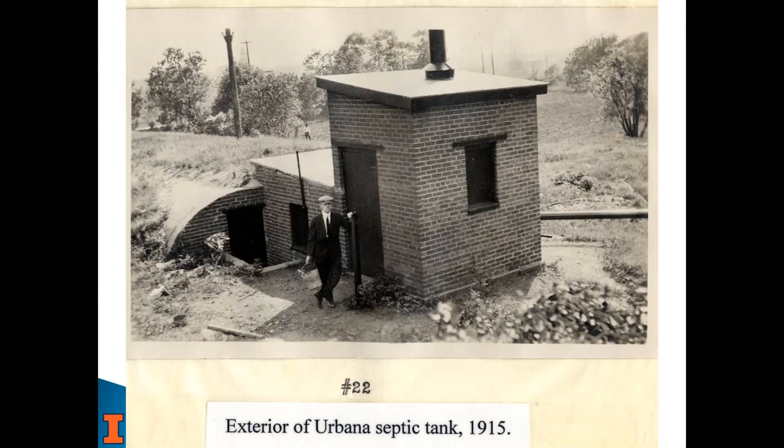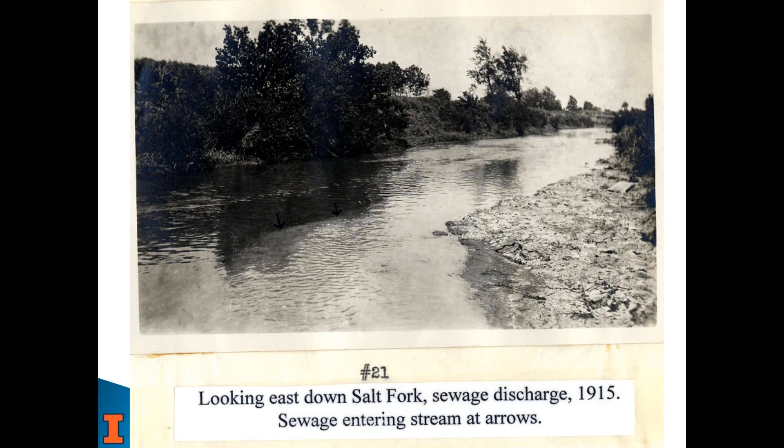And just to show some examples, Urbana, Illinois, the University of Illinois campus is in the Twin Cities of Champaign and Urbana, Illinois. Together, there's about 220,000 people in both towns. In 1915, this was Urbana's septic tank. And that straight pipe runs to Salt Fork, so direct sewage was entering streams. I know on this, it says see the arrows, they're very hard to see on here. But if you look at the shade from that tree where it goes from black to light gray, that light gray is all the sewage entering Salt Fork. And so this is where we were back then.

The water survey was involved in a lot of the seminal research related to wastewater treatment. Yeah, and it's a really cool history about our public health and all those things. I try to highlight that we've been around a long time working on some of these issues. Today, we're more of an applied research and outreach and education organization. We house the state's well logs in Illinois. We do a lot of support for communities and private well owners in Illinois and across the country.

So I'm Steve Wilson. I'm a groundwater hydrologist here at the Water Survey. With me is Katie Buckley, who's our Water Resources Outreach Specialist, predominantly working on the private well class. She makes me look good and manages all the back end for all of these events.

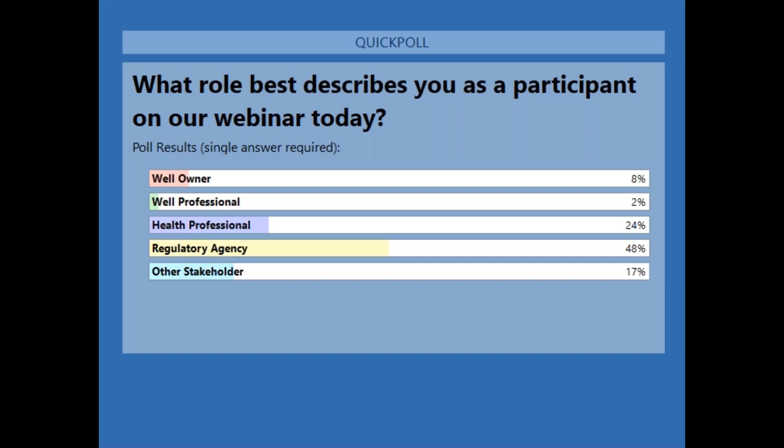If you are a well owner and you've not had a well assessment done, you can contact your RCAP region and/or contact us, and we'll get you in touch with them, and they can put you on a list to have an assessment done. As you'll see today, it's pretty useful to the homeowner, and it's all free.

Okay. So private well assessments, let's start with that. We developed this in 2016 with a group of private well experts that included public health, extension, drillers, you name it, several regulators. And it's really comprehensive.

We'll go through this today, but the idea was to create a tool that someone who is qualified and understands enough about private wells to actually fill this out can work with a well owner one-on-one and ask all the necessary questions: have they tested? What kind of pipes do they have in their home? Do a site assessment, find the well log if it's available, and look at the geology and any issues that might be there.

The idea is to do a vulnerability assessment, that's what I would call it, on any potential issues that a well owner should be aware of regarding their well, and also to remind them of best practices like testing annually for coliform and nitrate and other things every 5 years or so. So as I mentioned earlier, it's a fillable PDF.

RCAP, the regions have been conducting these assessments since 2016 or 2017 probably, and they've done over 3,600 around the country, which is really awesome. When you think about the size of the program and the amount of effort that's gone into completing even one assessment, it's remarkable what they've been able to accomplish. On the other side of that coin, there's 23 million private wells in the United States. And so we have a long way to go to reach and educate all those folks.

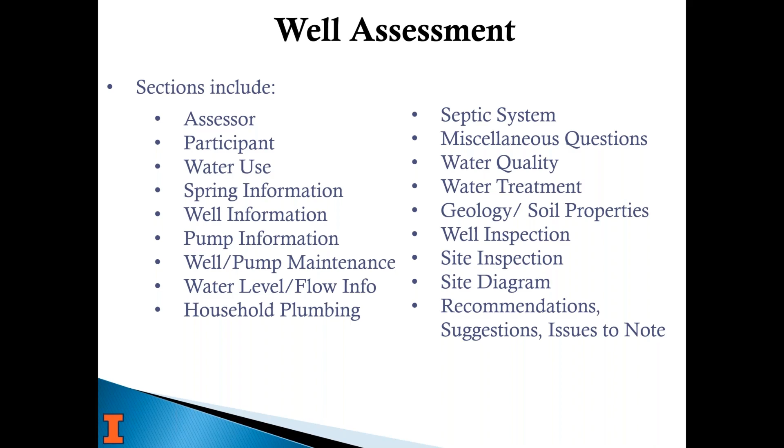As far as the on-site tool, it was built so that it could fit with the well assessment, but also could be used independently. We have 17 to 18% of all the homes in the United States have private wells, but over 20% of all the homes in the United States have septic systems. There's more on-site wastewater systems than there are wells.

And so we certainly run into places where someone may have an on-site wastewater system, but they're on community water supply. And we're going to go through 2 examples, so I won't go through this. Again, it's meant so that it could stand alone or be used together. Some of the sections are redundant, like who the assessor and the participant is, and water use, I guess, but most of it is unique to an on-site system.

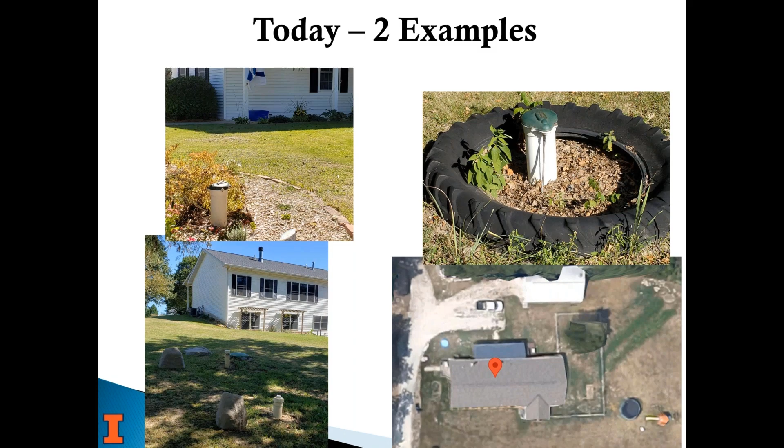So here's our 2 examples. The 2 pictures on the left are our first example. That's the well in the top picture and their aerobic system behind their home. Those fake rocks cover up the 2 white pipes sticking out of the ground. And then on the other side, we have another well, and then it's just a picture of their home. This one's interesting because in this Google Maps image, you can clearly see their septic tank and drain field, and it was really eye-opening to see that.

So I do want to mention that in Illinois, we've required well logs since 1968. And our State Geological Survey, who again is our sister agency, we share all these logs. They have this online mapping tool that's really terrific and shows you all the wells in the state that we have logs for. So we ran into this situation where the arrow points to the house that we're doing the assessment on, and every one of those homes, both on Doan Drive and Nicky Drive, so there's 13 or 14 houses there, I think, have a private well, and yet we only have records for 1.

And all these wells were put in the early 2000s. So that's a red flag. That means we have a driller potentially who's not filing logs with the county and getting a permit, which is illegal. And we're not a regulatory agency, but we use this information. And so there's one well there. It says it's 93 feet deep.

And when I looked at that log, the driller was also listed for several in the area. So I decided to give him a call and just find out if he knew what was going on. I'm going to scroll forward. I might have to go back. Oh, yeah. So anyway, when I talked to the gentleman, he's retired. He says, we turn in every log that we do.

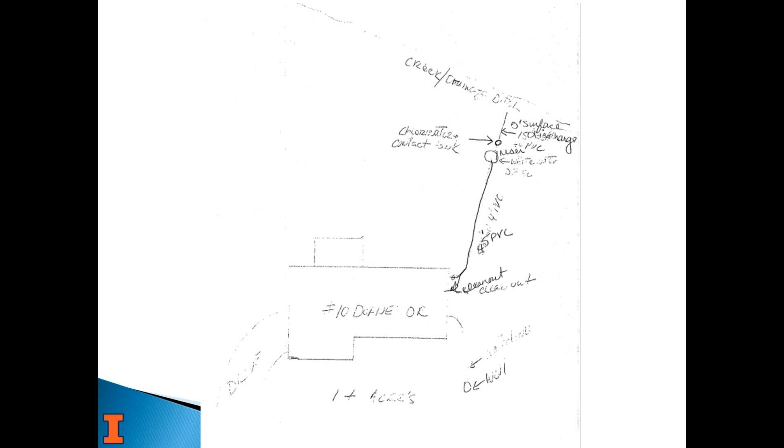We were also able to talk to the Piatt DeWitt Bi-County Health Department and get all their septic information or private sewage information. And so this permit obviously helped as well. There was a hand-drawn image of the house where the unit is, as well as the well. There's also a drawing that was done later, and this is facing west, I believe, but it's going downhill. There's surface discharge near a small ditch or creek.

This is the location. You can see where the house is. There's a pool off to the north. There's a bunch of trees, and then there's a fire pit down by the small creek. And so when we put all the information in that we know about the system, there's 140 feet between the aerobic unit and the water well, and it's down gradient. The cleanouts at the corner of the house, when we went out and visited, we were able to put all this information together.

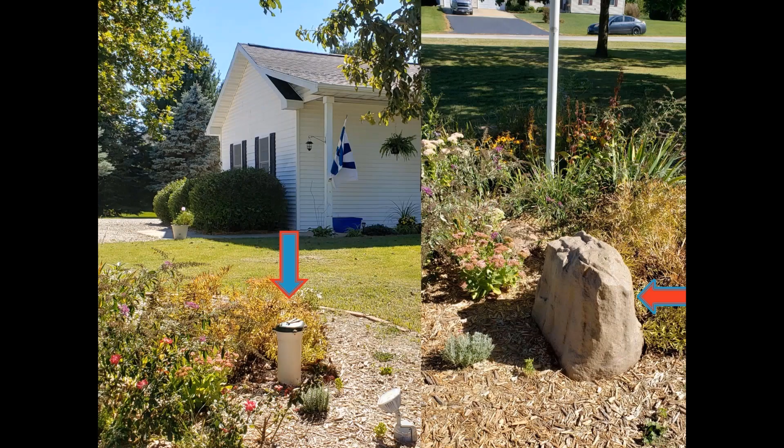And the idea in the assessment in the end is you provide this to the homeowner. If they were near somebody else or near a source, or if there were cattle nearby or some other thing that might be a vulnerability to the well, then that would be shown on here as well to give them that information. And so here's their well up by the house, and then it's covered by another fake rock, just so it looks aesthetically pleasing, I guess.

And so this is the private well or spring assessment, which I didn't mention, but there's a lot more springs out there in the world than I ever realized, doing most of the work I've done in Illinois. And so there are a lot of folks who use springs for their water supply, and they're a different kind of problem because they're almost always contaminated with bacteria. They're associated with the surface. Most of the time those need to be continuously chlorinated or disinfected with UV or whatever, but this assessment will allow you to do either of those things.

So at the top, it's just who the assessor is, who the owner is, and their information. Then as you move through this, we ask about backflow devices on any of their outside hydrants or spigots. They're not doing any activities necessarily where that's much of a risk. In the first place, they weren't sure. They'd only lived there a year and a half. We did find the log in the end. Initially, we didn't have a log for them, but a lot of this information came off of the well log.

We know it's a PVC well, that it's grouted to 192 feet. That was on the log. We knew the depth and where the water unit's coming from. And for a sand and gravel well like this, the advantage is, if it's properly grouted, which this appears to be, water has to come from the surface all the way down into that unit before it can get into the well. It's solid casing down to 208. And so there's really no risk of surface contamination.

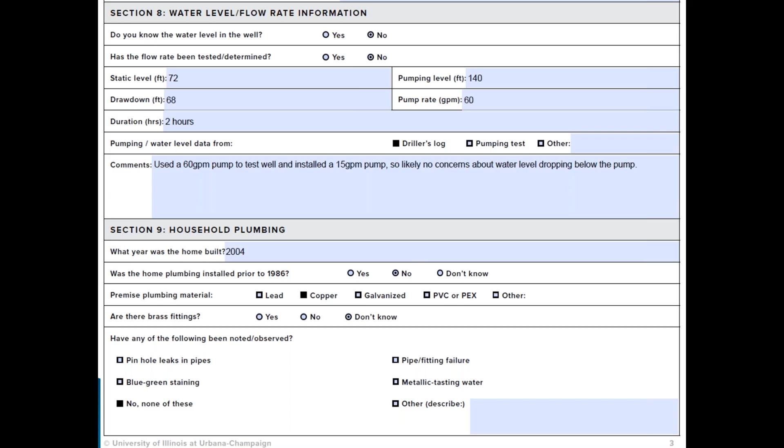We're fortunate, well, I'll get to that in the end, I guess, but we know a lot about the aquifer that this well is in. It's a large sand and gravel aquifer, and it's not typically known for having corrosive tendencies.

So this I mentioned before, this is all we put into the well assessment for on-site systems. Is there a system? Is it a conventional tank? What is it? This is an aerobic system. It's fiberglass. We asked the last time they pumped it. It's really basic questions about maintenance of the system and are they doing what they need to do.

And what we identified when we talked to these folks is that they've had to pump it twice in a year and a half. So it's filling up and there's some sediment in it. That wasn't the case with the previous owner who'd been there since 2006, I think. So that's one of the concerns and an issue. We think we've identified a reason for that, but we're not 100% sure.

We always ask these miscellaneous questions, if they have an emergency power source, meaning do they have a generator, typically if it's in a rural area. I grew up on a farm. We had an ice storm in 1976. We didn't have power for 7 days. If we didn't have a generator, that would have been a problem. A lot of folks don't think of that as being an important issue, but almost every pump I've ever worked with is electric, and without electricity, you're not going to be able to pump water.

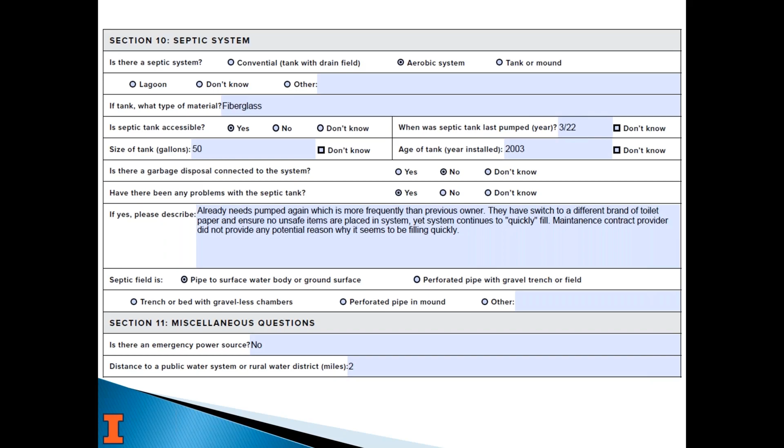We also ask if they've ever tested. Obviously, the motive here is over two-thirds of homeowners with wells have not tested their well before. They have no idea what their water quality is. In this case, it was tested for coliform and nitrate by the realtor before they moved in, and it actually had coliform. So then it was shock chlorinated, and following tests showed that it was clear. The sale went through, but they've not tested for anything else.

We recommend that you test for coliform and nitrate annually because they indicate a pathway into your well. It doesn't mean your well's safe if those are both negative. You could have arsenic or any other kind of constituent in your water that has no taste, no odor, and is colorless. So I mentioned to this homeowner, we know that there's arsenic in some places in the Mahomet Aquifer, which is the aquifer they're in, and so it really behooved them to test.

Also, manganese has been identified as a potential health risk for small children. It causes neurological problems. Currently, it's not regulated by the EPA as a primary drinking water constituent, meaning for health effects. It's regulated because it causes staining. And so they want to test for manganese regardless. And they've got grandkids, they're over at their house all the time. And so, that's one of the things folks don't realize. It's important to test not only for you, but for the folks that maybe come to your home.

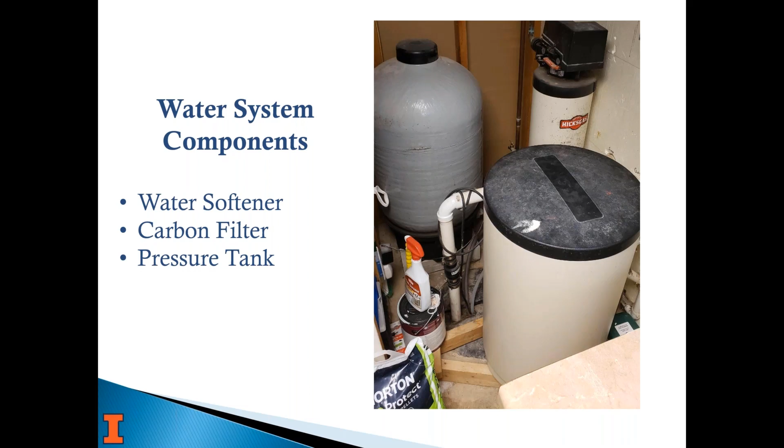This is the components in their basement. They had a water softener, a carbon filter, and a pressure tank. Nothing really out of the ordinary there. And then as far as soil properties and geology, we had a log, which is really helpful. We know the sand and gravel starts at 172 feet. It's mostly clay above that, which is great for protecting from surface infiltration. As far as the surface soil, we didn't have any information there.

But then we also do a well inspection while we're there. Is the well accessible? Is it in a pit? You'd be surprised at how many wells we still see in pits, which are both a safety hazard and also a water quality hazard, because in a heavy rainstorm, sometimes those pits fill with water, and if it overtops the well, it's no different than a flooding event. Now you probably have introduced bacteria into your well.

And then, just looking if it's got a proper cap and a vent tube, and that it's not in a floodplain, and all the common things that we have seen with wells. And if you've participated in our other private well class webinars, you've seen some pretty horrific pictures of animals in wells, or heard stories from some of the folks who participated in our webinars about what they found in their own.

We also then do an inspection of the whole area as far as what in the area might be a problem. And so there's 4 other homes with wells and on-site wastewater treatment systems. Some of those are up gradient from this home across the street. So it's just something to be aware of. If these were all shallow wells or it was in a sandy area, then that'd be a concern.

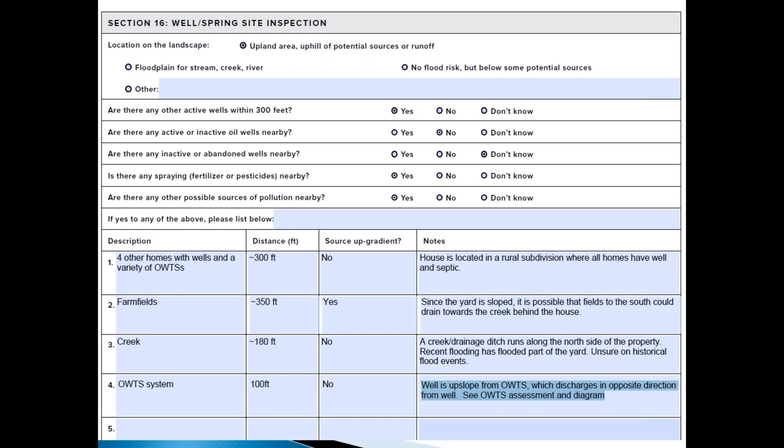Again, in this case, given the amount of clay above the aquifer and how deep it is, we wouldn't expect any of these issues to really be a problem. We just identify it so we can explain it to the homeowner. And so then, here's what we see for the whole region. There's a small creek running through, and besides the other homes that have wells and on-site systems, there's some farm fields. And the slope is toward that creek from both sides.

So what we recommended, basically, their well is properly constructed and everything seems to be in working order. In my opinion, the carbon filter is likely for taste or odor. We commonly see that. But since you haven't tested it for those other things, you really should evaluate inorganics and metals. We do know, again, this is the Mahomet Aquifer, and we know that there can be arsenic in that aquifer. It's very hit or miss where we're at, but further west in Illinois, it's much more significant in the same aquifer.

Yeah, and so I mentioned the manganese thing earlier. If you have copper pipes or lead pipes or whatever, the thing to remember about home premise plumbing like that is you can have copper pipes and have no issues. It isn't like copper pipes are bad. It's if the water is corrosive, or aggressive, that's another term that's used, then it can be a problem because it can leach that pipe material. But if it's not, it can also form scale.

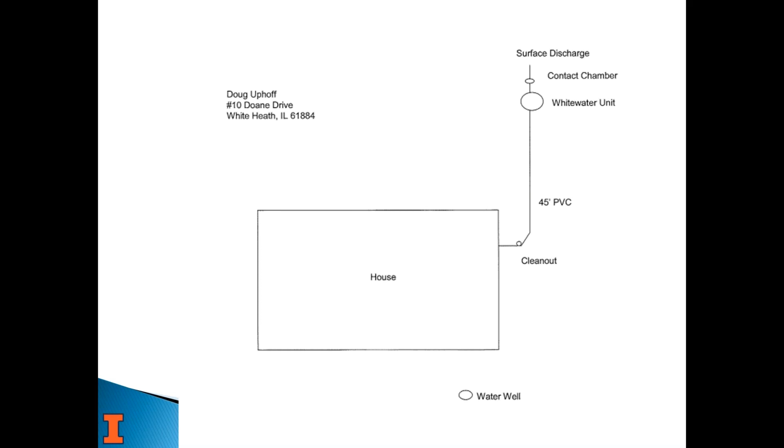So again, their well's in the front of the house, and as you go down the hill, there's a clean out right by the corner of their house, and then it goes down to their aerobic unit, and it discharges. And they've got a really nice setup where their discharge is right before it gets down into the floodplain. They've created a little wetland with rocks, and they're growing plants where their water discharges. I'll show you that in a second.

And so the first two sections of the on-site wastewater system assessment are who the assessor is and who the folks that own the property are. I skipped that, but then as we get to section 3, it's about why. A lot of times we'll get a call, or RCAP will get a call, from someone who wants an assessment done because they've got some sort of issue. That's typically why people call us. When your well's working fine, you got plenty of water and water pressure and everything tastes great, folks go about their business. And then as soon as something goes wrong, they start calling and asking.

The goal of our program is really to help people learn more of the basics about their well and their on-site system, so that they can figure some of that out on their own, and they also have a better idea of what the problem might be, so they can ask better questions when they do have to call a professional. And so this includes a description, how we found that. The original owner was this Doug Uphoff. He doesn't live there now. I guess it was in 2003, not 2006. All the information that's relevant, number of bathrooms, bedrooms, people living there, and the information they had about their installation and their pumper all go in this information. It puts it all in one place.

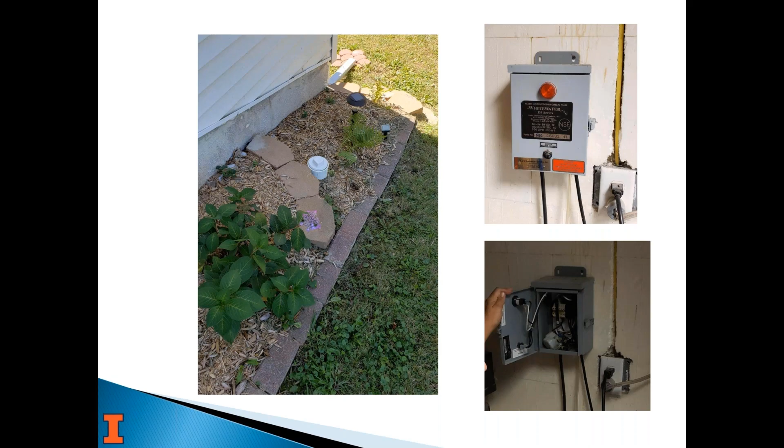Yeah, everything seems pretty in order here for this home. It's an ATU. Did I go backwards? What did we do here? Okay, so section 11 is all our site observations where we're out there. And again, I put this up.

We ask common questions. Is there a sump pump connected? Have they had any backups? Is there anything else? Do they have an emergency power source? Again, that's an important question. All those sorts of things. Their alarm panel was in good shape. Everything seemed to work. And so this is just going through our due diligence to provide them information they need about their system. And then section 13 for this is a set of recommendations.

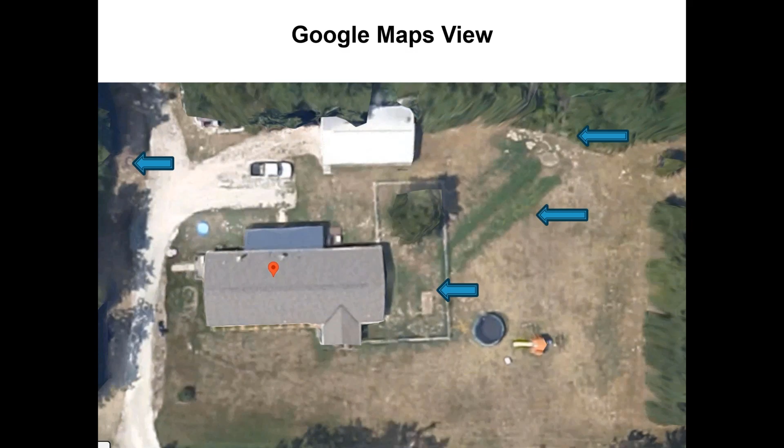And this well is shallower. We're not going to talk a lot about it, but I do remember the log for this was 28 feet of clay and then sand and gravel to 52 feet. But for some reason, instead of installing a sand and gravel well with a screen, they put in a large diameter bored well with a 3-foot concrete tile down to 52 feet. And so, yeah, the good news is there's 28 feet of clay from land surface down to the aquifer here.

And so here's all the different pieces. The clean outs at the corner of the house, that wet spongy area, as I mentioned. When we were there, it was in full form like a wetland, very similar to what the last folks had, but it was standing water and spongy. I tried to walk in there to take a picture and I started sinking. And so, yeah, it was interesting.

Again, here's their well. I'm not going to talk much about the well, but it was drilled in 2006, I believe, maybe 2003. And I already described and we did find the log. This is another case where the log, when we looked online on the mapping tool, a well didn't show up here. And so we contacted Vermilion County, and the gentleman with the county who does all the septic permit work also does all the well permit work, and he remembered this site.

And so he was able to find the log because he knew who the driller was and the owner at the time. And he sent us an updated log with handwritten coordinates on it and said, you need to change this in the state system to put this in the right place. And then the other picture here is that bare spot is where the opening is for their septic tank. It's buried. It's not visible and not above ground.

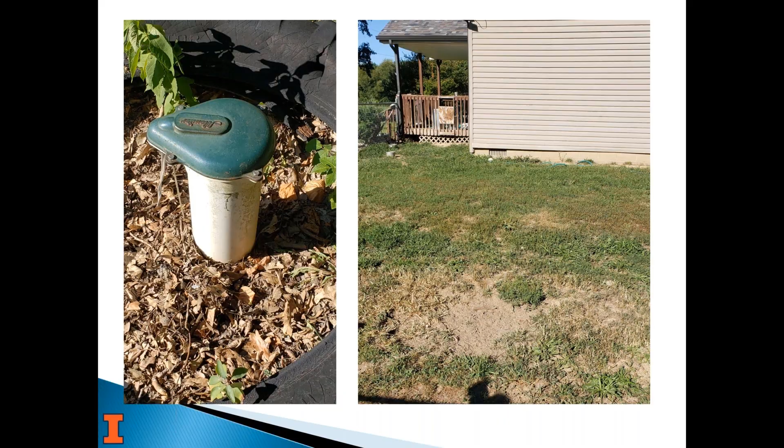I don't know. I don't even know who this driller is. I know a lot of the drillers in the state, but this person I've not ran into before. And so I've never seen it actually listed that way. But yeah, that's only 1,440 minutes in a day. So that's just a little over 1 gallon per minute. This well will produce a lot more than that, given the sand that it's in.

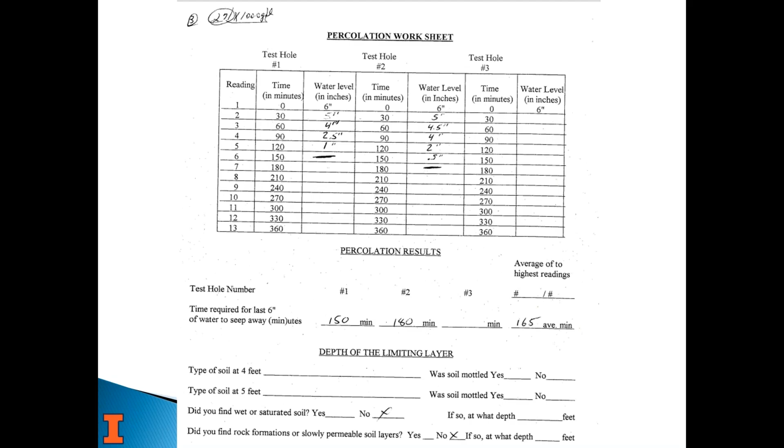And so they did do a perc test here. You can see those results. It said 150 for the first example, 150 minutes, and then 180 minutes. So according to Sally, this is about average permeability. And so just providing that information to the homeowner and what it means.

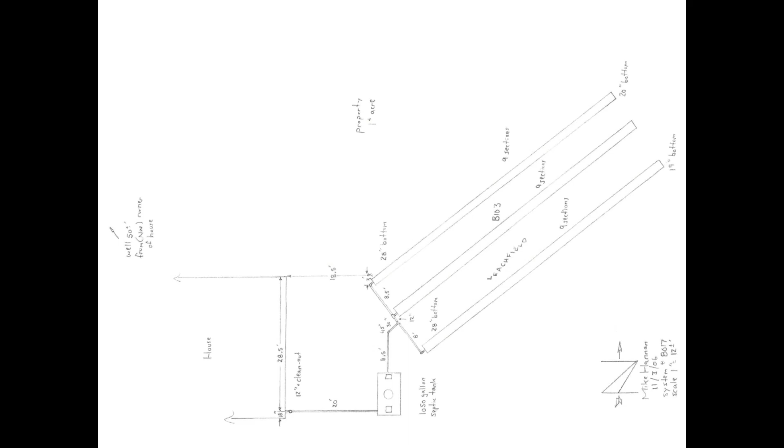So this is their as-built drawing by the county. And you can see there's 9 sections to each of those chambers, 3 lines. It goes from the septic tank straight into those 3 sets of chambers. And the land starts sloping away. And I turned this sideways because, as you remember, here's this diagram. You can see the tank and the 3 lines.

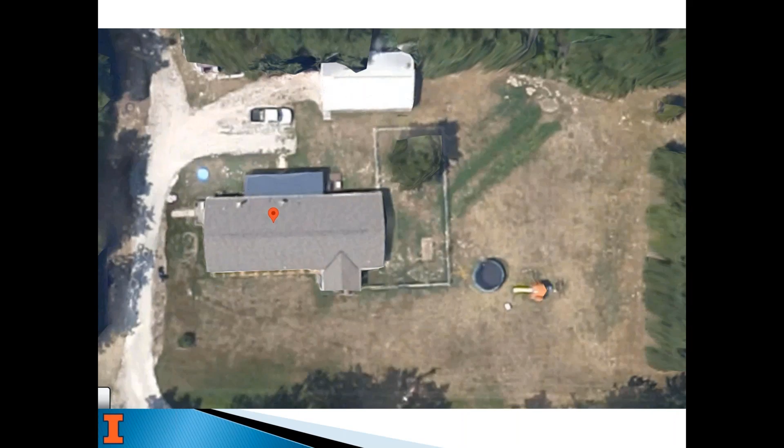And again, the land is sloping a little bit away towards those trees. And so you can kind of see that here. There's 3 areas there where it's a little hard to see with this picture because my phone doesn't take great pictures, I guess. But it was more clear. You could see the little swales in the yard fairly clearly when you're there.

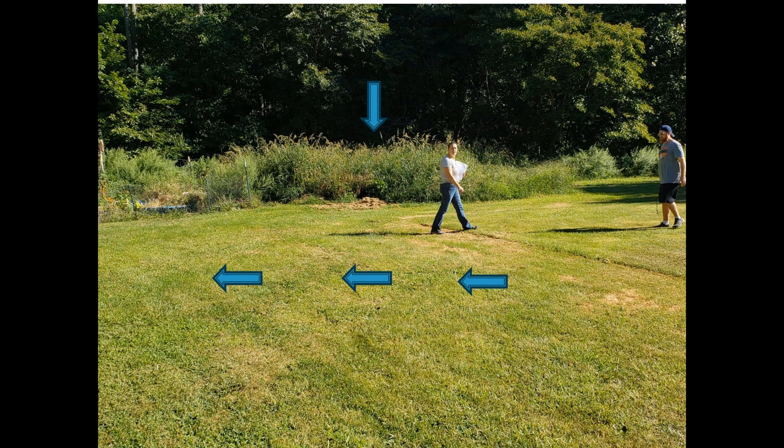And then behind Sally, that's all wet and goes back in the trees, and there was water all the way back past the trees, standing water. Oh, I forgot I had a picture of that. So yeah, this is what that looks like behind there. And that really shouldn't be happening, right?

So, their water source is a well. We ask if they have a water purification system, really meaning, in this case, they have a softener, but it's an opportunity to see if they have anything else that might use a lot of water that's going to affect the system. And then they're in an upland area. There are no surface water issues by the house. It's really the drain field itself causing a surface water issue on a lower elevation away from the house.

So it is green and lush. We see that issue. We try to explain to them that the reason it's that way is because the system's being overloaded a little bit, and so it's not able to drain like it should or percolate down below the unit.

And so what we learned here is, let's see, I'm on the right one. Yeah, so they did have a permit. We have all the same types of information. I'm not going to go through all of these. It's a conventional system. They pumped the tank in '21. The person who pumped it basically said your tank was completely full. And so we explained why they need to understand the number of people living there and number of bedrooms and make sure that they're pumping it on a more regular schedule. He didn't know if it had been pumped before that.

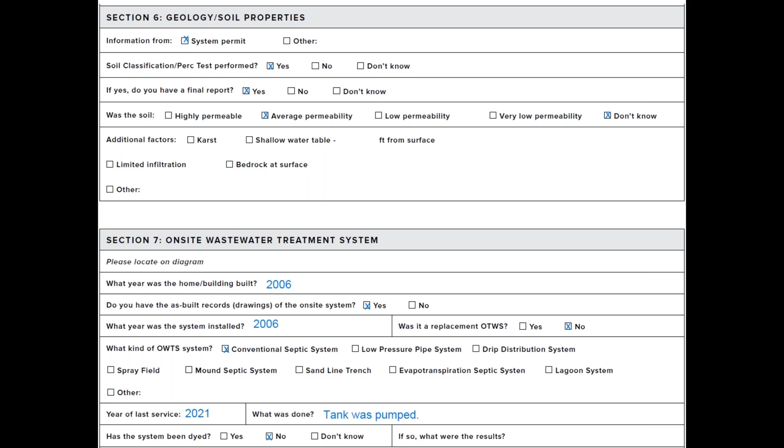And it's funny because we do a septic webinar every July, and we always get questions in advance for those webinars. And there's people who swear that they've never had to pump their septic tank, because they use additives or for whatever reason. And my answer is always the same. Well, just wait, because it's eventually going to be a problem if you don't pump it.

So it's a 1,050-gallon concrete tank. It was pumped through the manhole. It's not visible. It was completely full, as I mentioned before. And so again, as we go through this and explain it to the homeowner, we're able to explain why this is bad or why this is good, or here's why this is important, and we list it so that you can basically give them the tools. And the other thing is then to go through this as you're writing the recommendations and make sure you give them something in writing that explains, here's what you probably want to do here.

Yeah, it's a trench or bed with dispersal media, chambers. It's this biodiffuser, 3 plastic leaching chambers. And then as we go through the site observations, the risers weren't visible. There were no odors. When I stepped back into that wet area, it was certainly soft and mushy, and a lot of vegetation, but there was no odor whatsoever. And I'm not 100% sure what that even means. You would expect, I think, that eventually that's going to change.

And then they do use additives. We explained that if their system's functioning properly and they're only putting things they should into their septic tank, they really don't need those additives. And as we talked to them, we found out that it's a blended family. Two folks who both had their own kids and then got married, and they went from 3 people to 6 or more, because they added 2 bedrooms, and now they have a 6-bedroom home with the original septic tank that's 1,050 gallons. And so we realized that's really what the issue is. Their tank and drain field is undersized for the number of people living there, and that's why we're seeing that discharge reaching the surface.